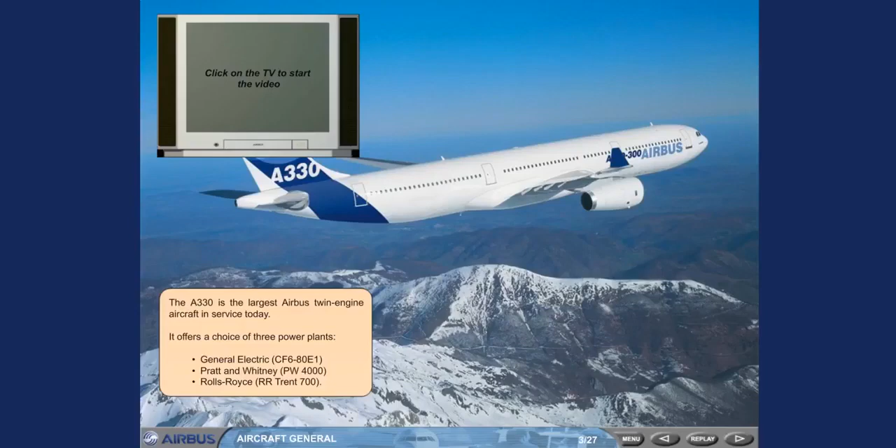With a maximum takeoff weight of 230,000 kilograms, 507,040 pounds, the range of the A330-200 is 6,400 nautical miles.

With a maximum takeoff weight of 217,000 kilograms, 478,400 pounds, the range of the A330-300 is 4,900 nautical miles. Note: for the customized values, please refer to your airline documentation.

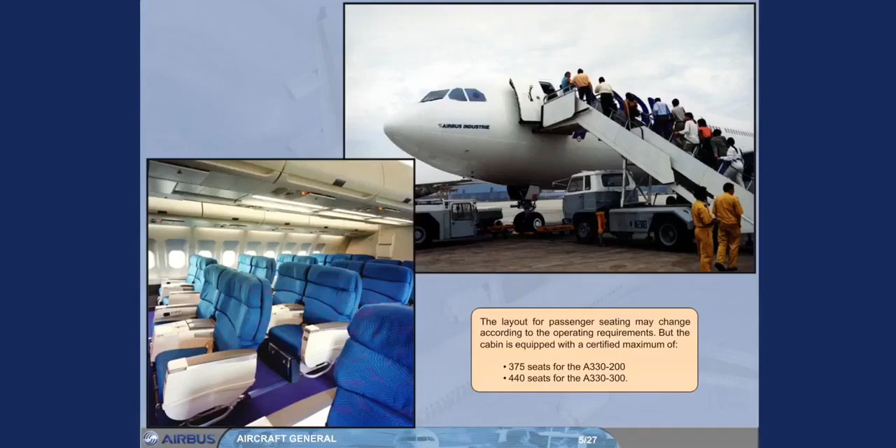The layout for passenger seating may change according to the operating requirements, but the cabin is equipped with a certified maximum of 375 seats for the A330-200, 440 seats for the A330-300.

Between the two aircraft, the wing span has not changed, whereas the A330-200 length has decreased and its height has increased.

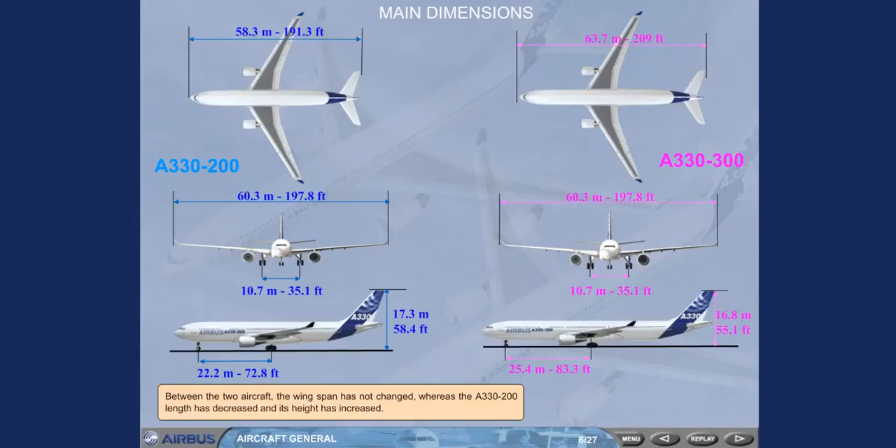The following areas are unpressurized: the tail cone, the main gear bay, the nose gear bay, and the radome.

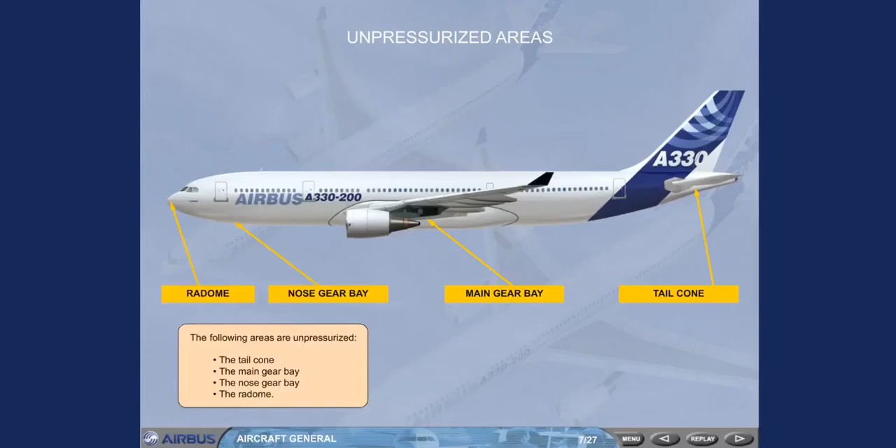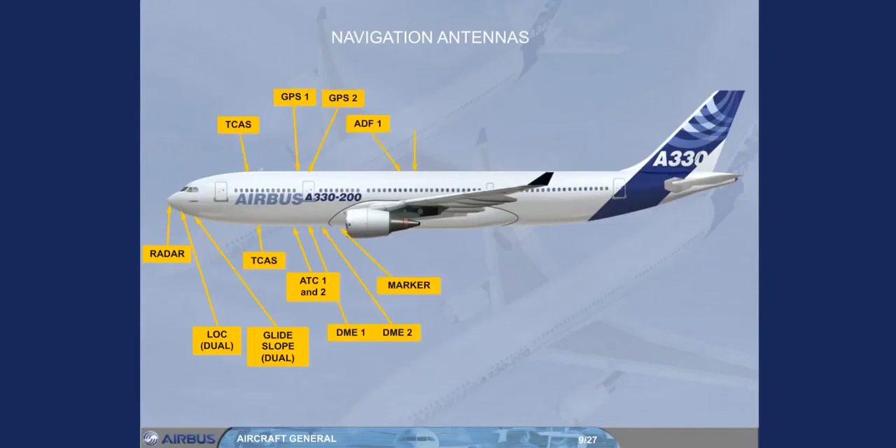Let's now have an overview of the location of the navigation antennas: radar, localizer and glide slope, ATC 1 and 2, DME 1 and 2, GPS 1 and 2, marker, TCAS, ADF 1 and 2, radio altimeter 1 and 2, and VOR.

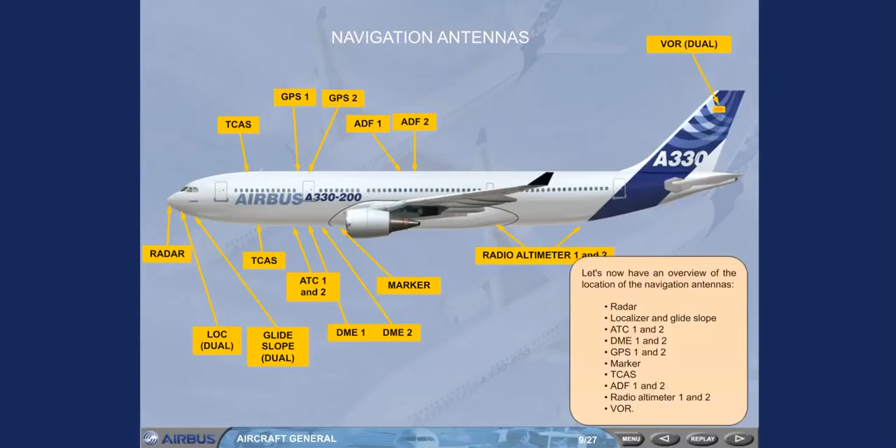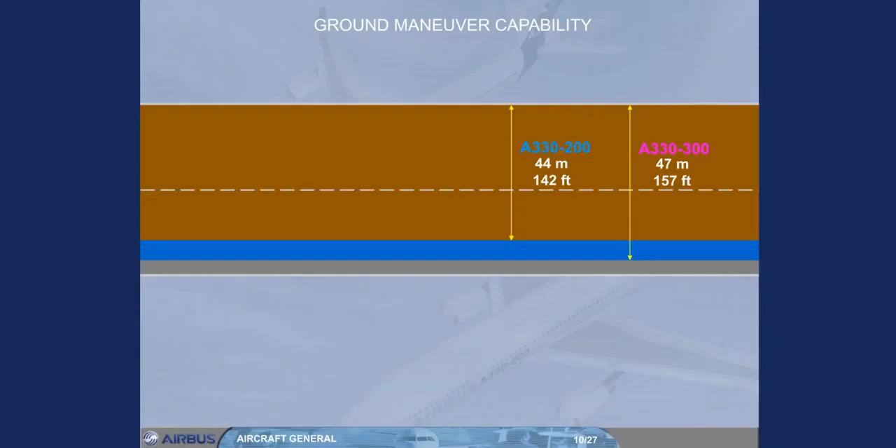The minimum pavement width for a 180 degrees turn with symmetric thrust and no braking is 44 meters, 142 feet for the A330-200, 47 meters, 157 feet for the A330-300. Based on maximum steering limit of 72 degrees.

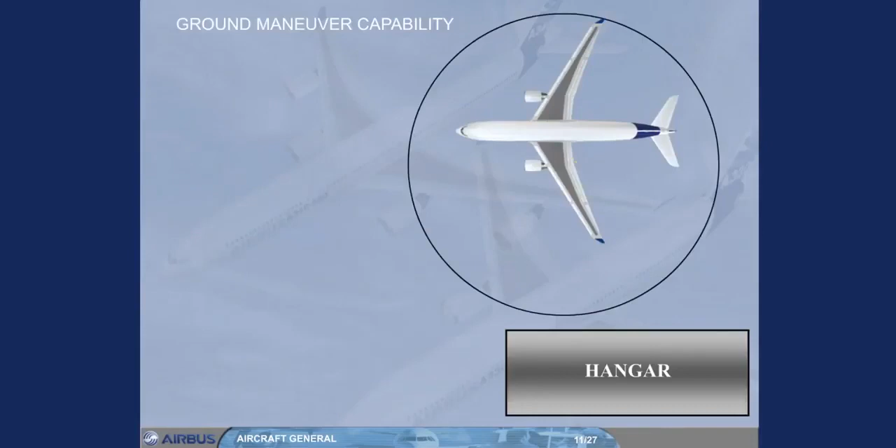For the A330-200 and 300, if the wing clears the obstacle, the tail will also clear it.

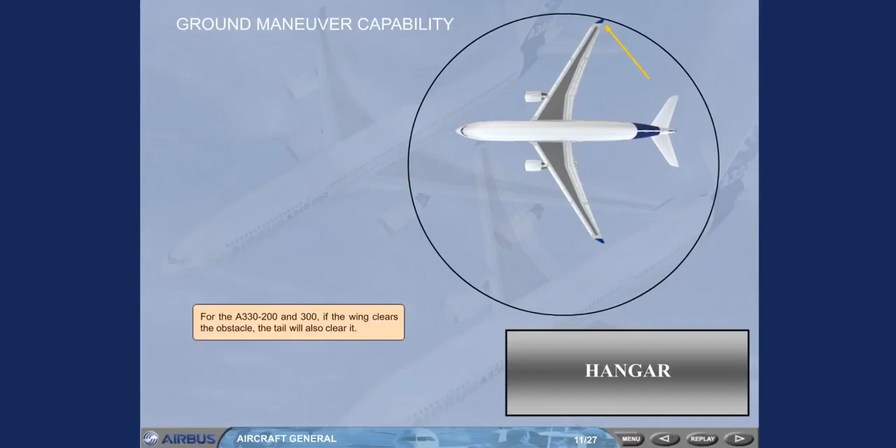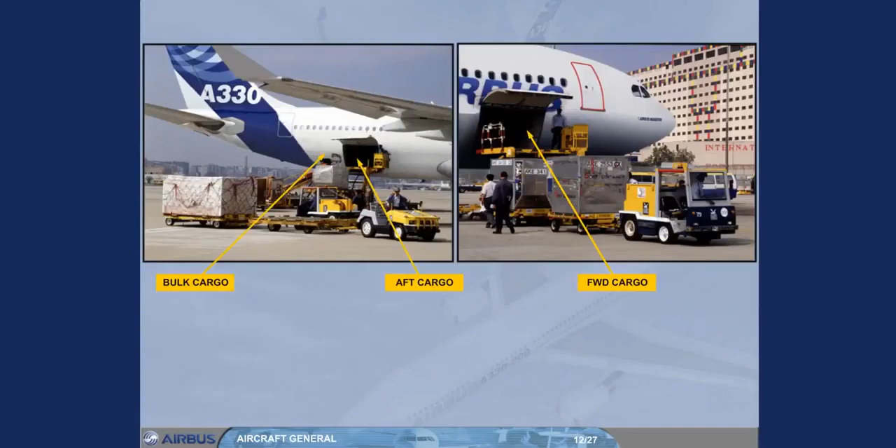There are 3 cargo compartments: a forward cargo compartment, an aft cargo compartment, and a bulk cargo compartment. The size of the fuselage accommodates standard containers.

The cockpit of the A330, a 2-man glass cockpit, is the most advanced cockpit of any civil airliner. It is designed for 2 crew members and 2 observer seats. The system controls are located on an overhead panel, in such a way that both crew members can monitor them.

It has an optimized layout of 6 CRT display units. The absence of control columns between the pilots and instruments ensures excellent visibility of all instruments.

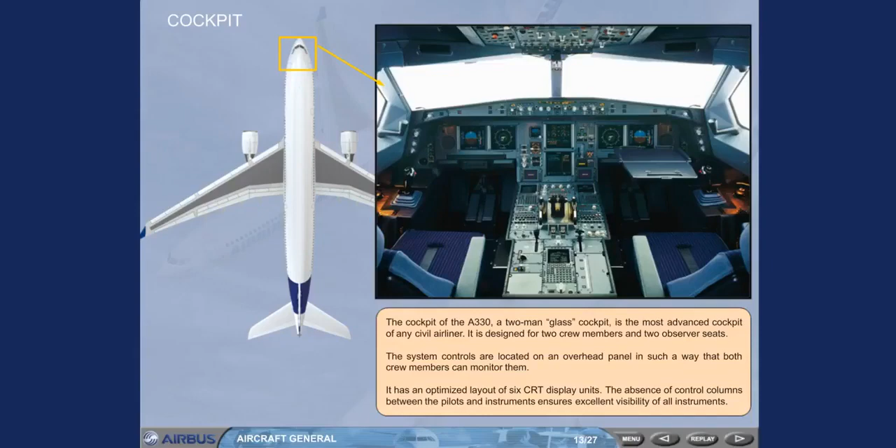The pilot's seats are electrically or manually adjustable. All the seat adjustments will be presented during the simulator session.

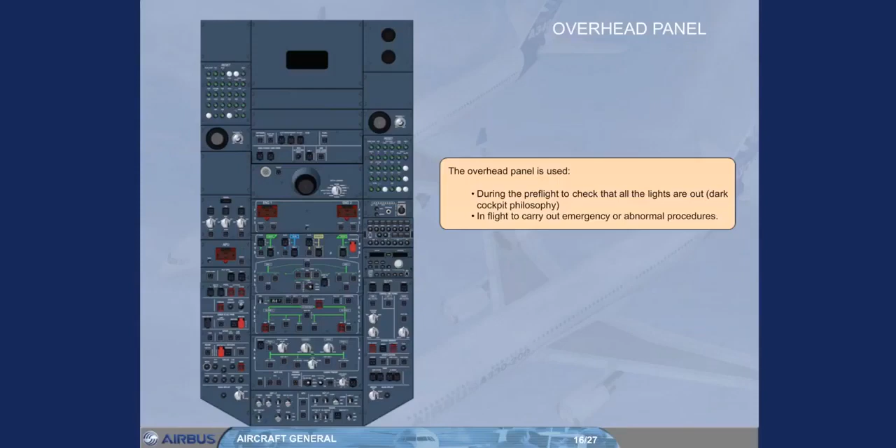Click on the overhead panel area to display it. The overhead panel is used during the pre-flight to check that all the lights are out, dark cockpit philosophy, and in-flight to carry out emergency or abnormal procedures.

The central part of the overhead panel is dedicated to aircraft systems such as air conditioning, electrical, fuel, hydraulic, and fire. Note, the most frequently used controls are located on the bottom part.

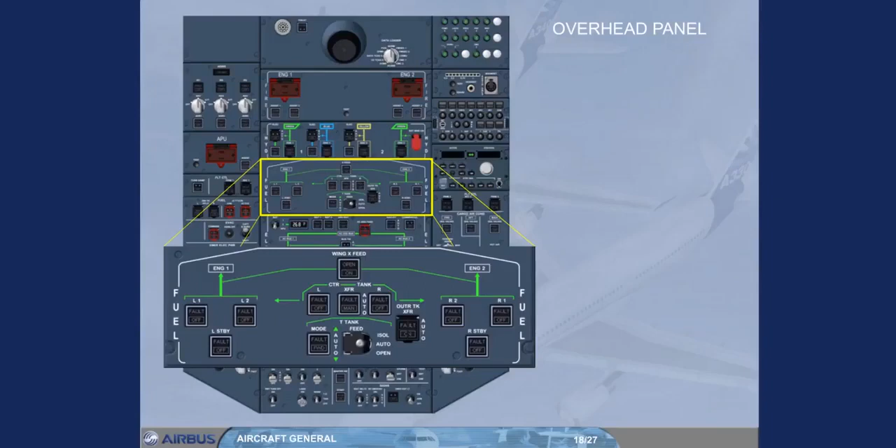For a closer look, let's select the fuel panel. On the left and right sides is the system name. For each system, there is a schematic diagram. Notice all push buttons are in the Lights Out configuration.

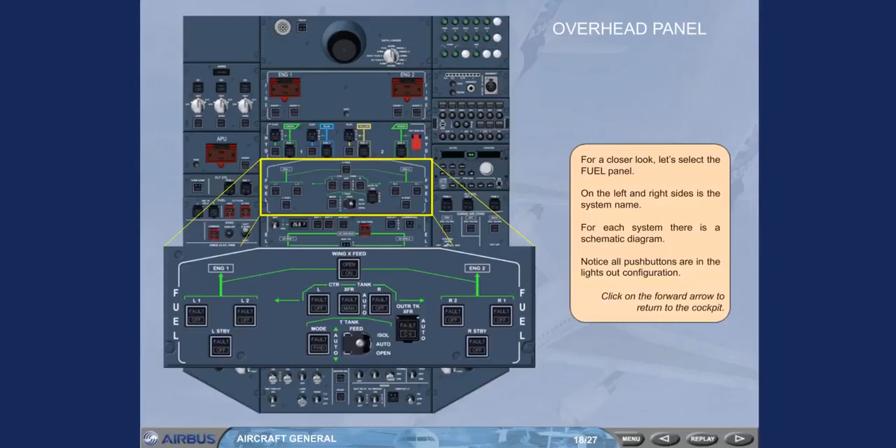Click on the forward arrow to return to the cockpit. Click on the glare shield area to display it. The glare shield is used by the pilots for flight guidance and short-term flight management. It is also used to control the electronic flight instruments.

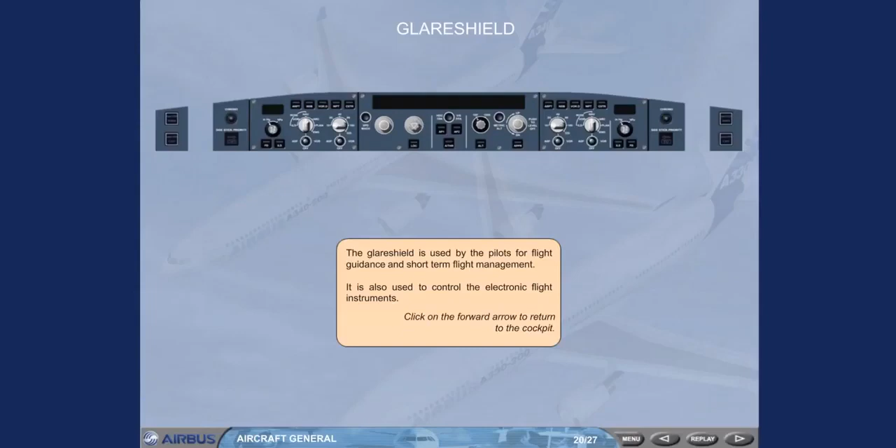Click on the forward arrow to return to the cockpit. Click on the Instruments panel area to display it. The Instruments panel provides the following information to the pilots: flight information through the Electronic Flight Instrument System, EFIS, and standby instruments, system information through Electronic Centralized Aircraft Monitoring, ECAM.

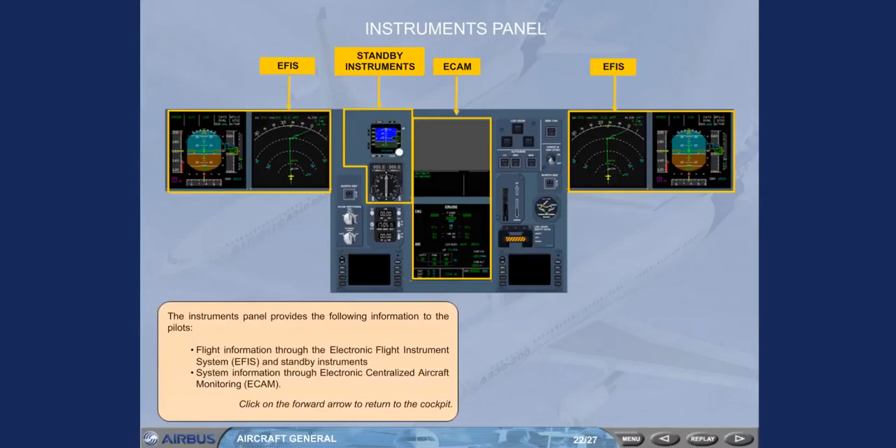Click on the forward arrow to return to the cockpit. Click on the pedestal panel area to display it. The pedestal includes the controls which are usually found in conventional aircraft: radio communication, flaps, speed brakes, engine controls.

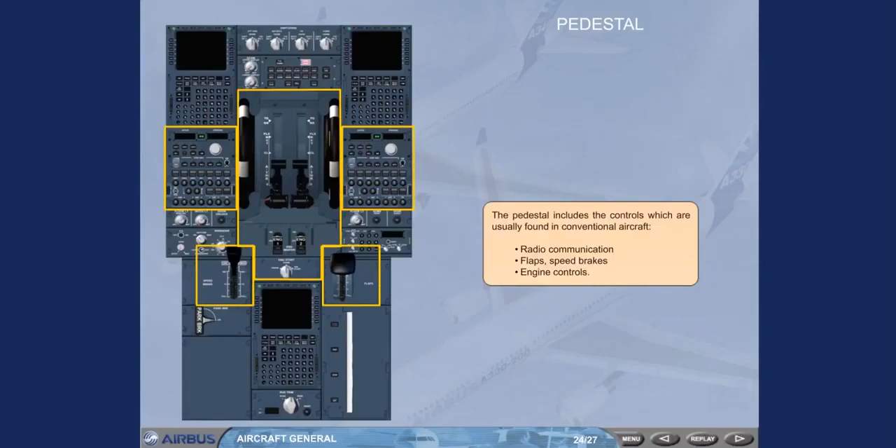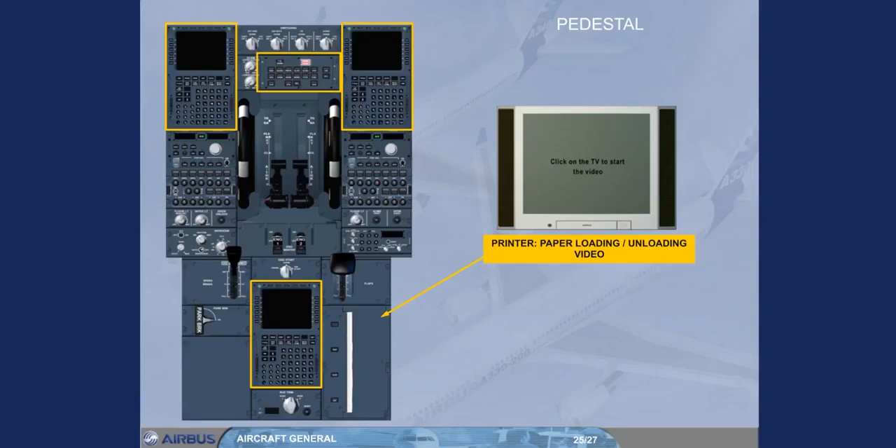It also includes the ECAM control panel, the multipurpose control display units, MCDU, which are the long-term interface with the flight management and guidance system. Click on the forward arrow to return to the cockpit.

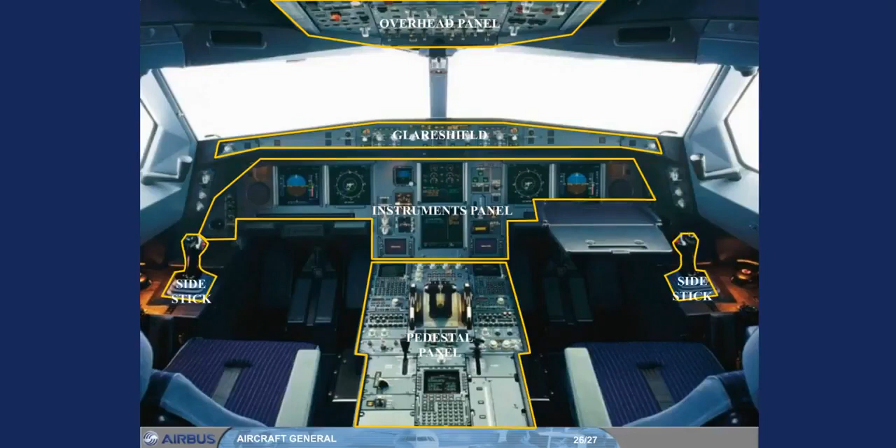Finally, click on either side stick area to display them. The aircraft is flown manually using either side stick. They are located on the left and right sides of the cockpit.